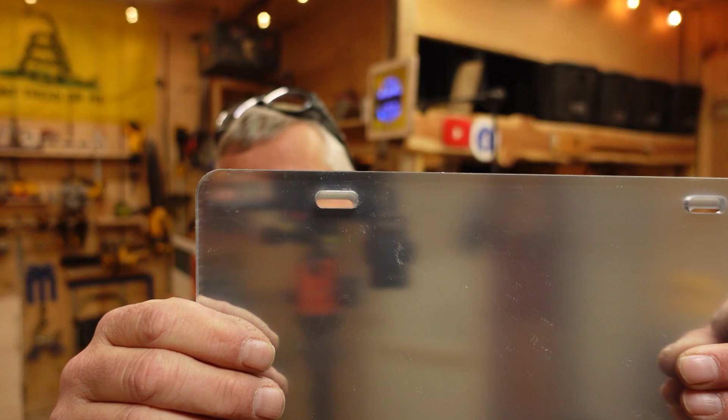This is a tag that he is using for a multi-layered project. I don't know if you can see it, but the holes on the blanks that he got, the holes ain't where they need to be. So this is the acrylic outer part that he's going to be engraving. This is basically just a metal backer that everything will be adhered to. Well, that's a problem when you can't get the screws through it.

So because Tim does have a Thunderbolt machine, he can cut the acrylic, but he couldn't cut the aluminum. So he asked me if I could do it, and guys, it was a mystery, but we're going to try. So if that's something you're into, stick around, and we're going to see if we can't cut this aluminum tonight.

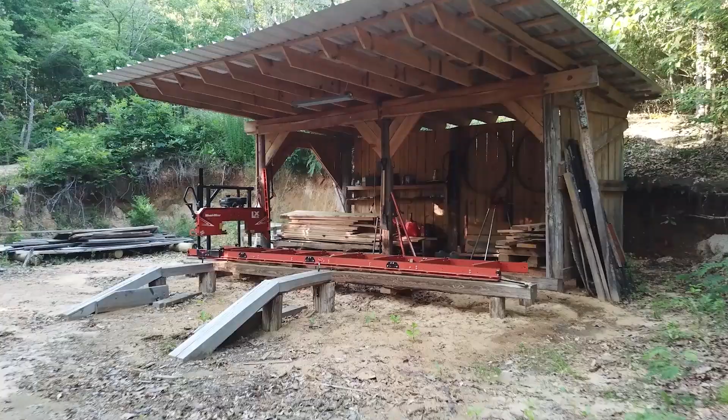All right, guys, so a lot of you are probably like, Clack, you can't cut aluminum with a laser, and you would be right, guys. But you can cut it with a CNC, or so I had been told. And when Tim asked me about the project, I don't like telling people no, but this was, guys, just for the record, this is a laser and CNC job that I'm doing tonight.

The main file, I'm gonna show you the screen capture, and kind of walk you through the process of how I went about creating the file. But I basically have created myself a template, which I may use in the future with some acrylic, that mimics the tags. I use the acrylic one that Tim needs the holes to line up with so that I know how to modify these guys.

And in the process, I made myself a jig for the CNC to allow me to insert these things into a jig and just rip them out. I've done most of them. I've got like 3 left. And I thought about it, and I was like, I bet these guys would like to see this process and kind of see how I got it set up. But so that's what we're going to do.

I'm going to walk you through the computer part of it, and then once we get through that, I'm going to take you over to CNC, show you how I got it set up, and let you watch a couple of them in action. So let's get started.

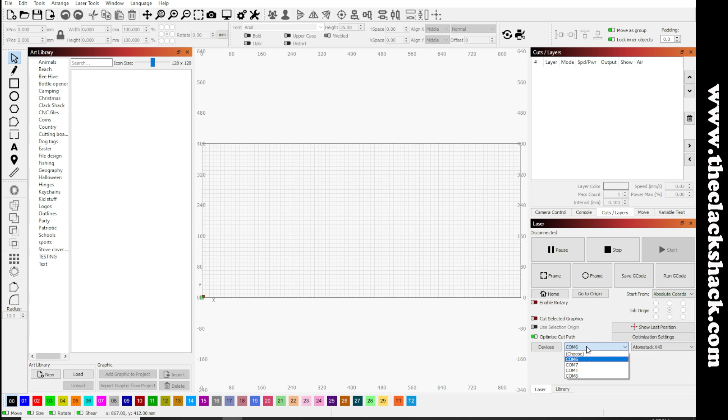All right, guys, and there's probably better ways of doing this, and I wound up kind of redoing the holes after it was all said and done. In VCarve, but this is an easy way. If you don't have VCarve to modify files, you can get really close. Now sometimes there's going to be some testing, but basically what I've did is I've used the camera to capture the shape.

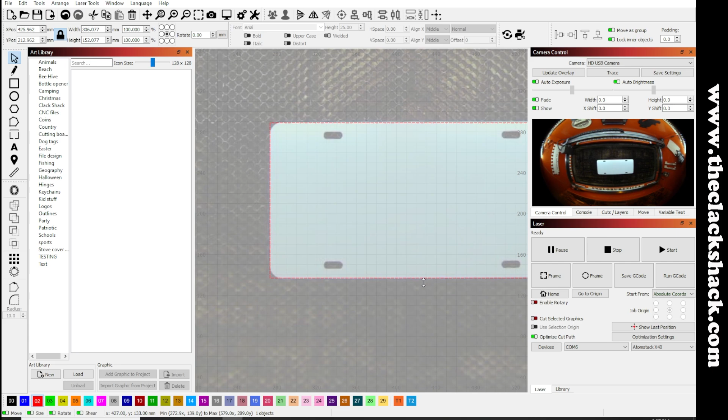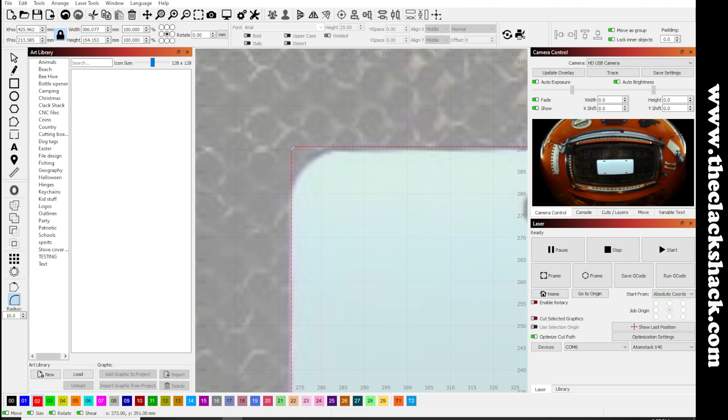I'm just drawing a box around the edge of the shape to try to mimic how big it is in LightBurn. Now, depending on your camera calibration, the thickness of the material, there's some variables that can cause some variations, but it's really handy when you're trying to design something to be able to kind of see the beginning product and what you want it to look like and just work through it from there. So we'll just kind of go through this a little bit faster here. I'm tracing everything out and just adding circles and squares and all that kind of stuff to try to create this shape.

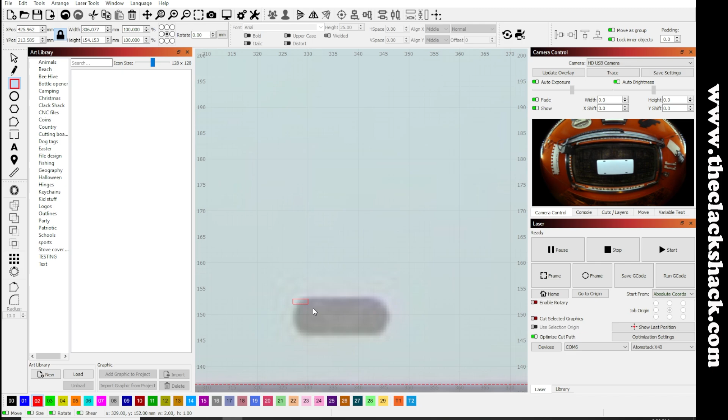I'm going to add a couple of squares, just small squares in the middle, and then a couple of circles to make that shape that's on the material. So basically I created a little box and a circle, and now I'm going to take the circle and replicate it because I know the spacing from center to center is exactly the same as that box. I'm going to set that up and make sure to get my spacing right, which should be 7 millimeters.

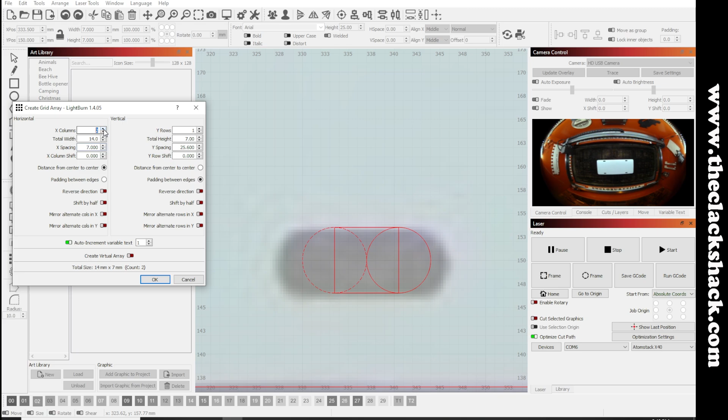Once I replicate that over, it's going to automatically line everything up for me, and that'll give me the ability to use the addition function on the booleans to make it look like that shape. Now it's going to need some resizing, but basically that just keeps me from having to go through it with the node editor trying to set that up.

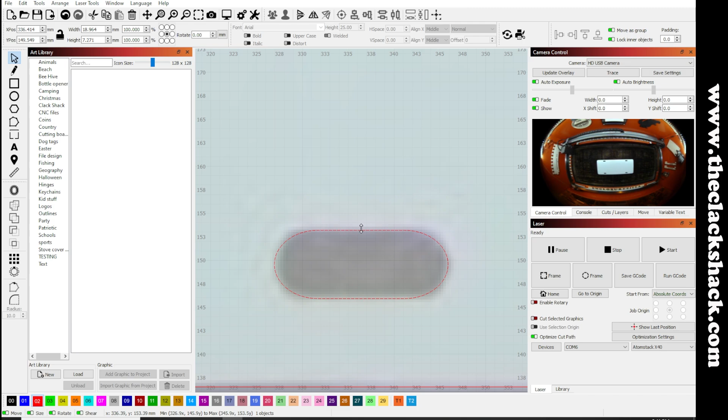Like I said, I had to make some adjustments once I got it to the CNC, but this gives me a good SVG going into VCarve to get this started. Basically all I'm going to do is create 4 of those, or 3 more, and add them everywhere there's supposed to be a hole. So once I got the outline of the tag done, I went and got myself a piece of material.

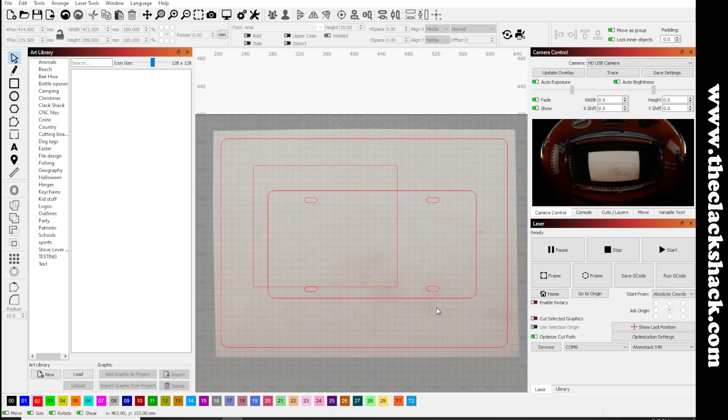What I'm doing here, guys, is I want to create a jig that I can attach to my spoil board with screws to hold this tag in place. So that's what I'm doing now, basically outfitting this thing to work as a jig once I cut it out. That will enable me to repeat the process with all these tags without having to worry about placement or whatever. I'll be using 4.5 millimeter Luan.

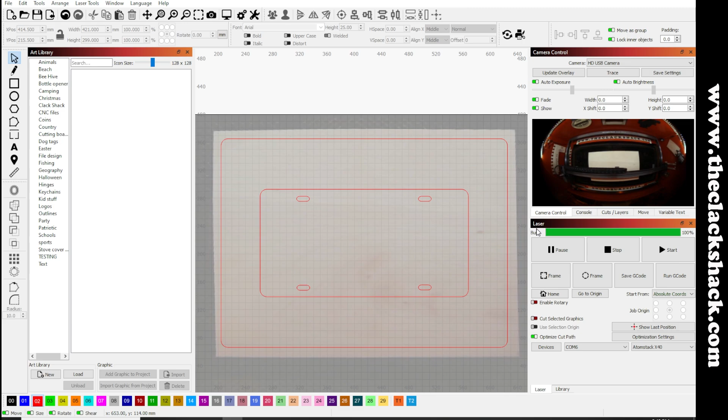All it is, the only purpose of the Luan is to hold the tag down. I'm going to try to set the speeds and stuff so maybe it won't fly off of there. So I send the job over to EnclosureZilla and get it started, and I'll let y'all see a little bit of this and fast forward.

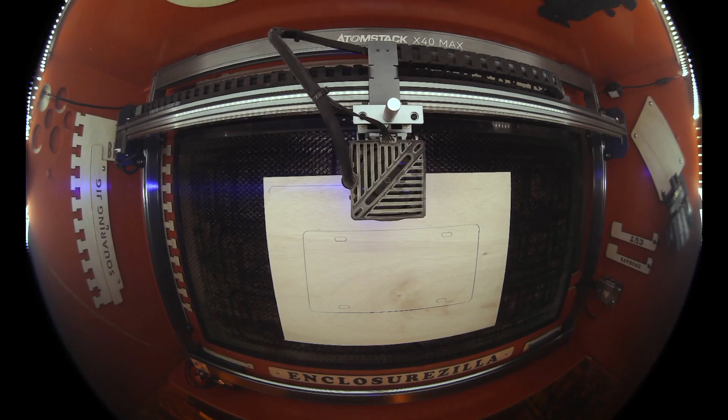All right guys, so over at Vectric, the way I'm going to do this is bring an SVG file in that I exported out of Lightburn, by creating a new file. Now on this file, and I'm having to redo this, a lot of my settings are already in here, lucky me. Even though this is a new file, the settings are already here.

So the dimensions of the tag itself are 304 by 152, and according to my cheap calipers, it's 0.65 millimeters thick. So I'm going to set it to material surface, and I want my zero to be in the bottom left corner because I plan on utilizing the little dead space where that curve is as my zero. That'll also give me a reference that'll be easy to find on my material.

I probably should have put that in the file for the laser file of the jig that I made, but I didn't think about it until it was too late. So now that I've got my work area the way I want it, and it is exactly the size of the tag...

I'm going to go over here and go File and Import Vector, because I saved it as an SVG. This is my CNC file, so I'm not going to be in that folder. I saved this as a laser file over here in my laser stuff, and we're going to be looking for the file of license plate, which is here. And there's the SVG that we exported. I'm going to bring that in.

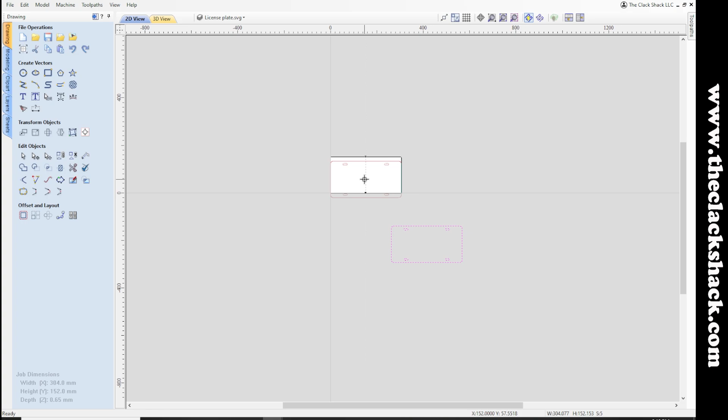I'm going to come over here, grab this guy, and drag it into the work area. And it should snap in the middle. So it did.

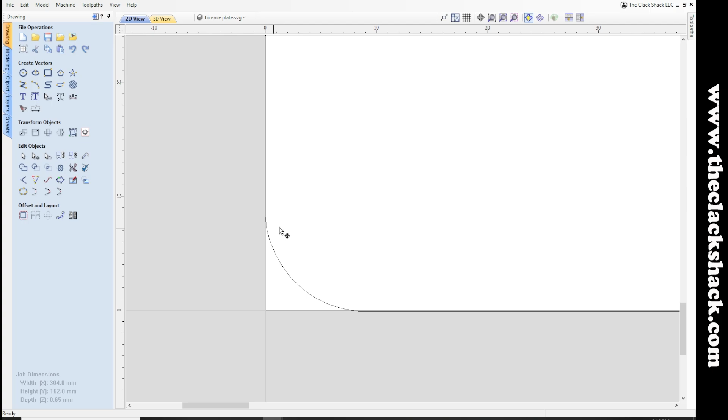Now, on my little jig, right here is where I made those lines, and where those lines intersected, that's where I set my zero at. And having this little curve here actually afforded me some flat space up above the work area to do it. Now, I did set the Z-axis on the material when I was getting ready to cut.

So that's one thing you got to be mindful of. Using this jig, you're going to have to set the Z-axis using the probe here in the working area of the material. Now, all I did, once I got it in here, guys, I did come back and do a little bit of tweaking and adjustments because it wasn't exactly perfect.

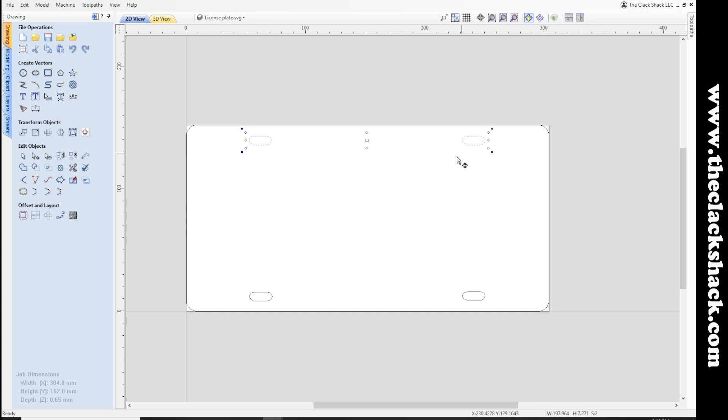But basically, you would go in here, select these 4 little holes right here, and I'm still learning this stuff, so bear with me. And then I set my depth, but even though my caliper said that the material was 0.65, I went ahead and did 0.55 because I didn't want to go into my spoil board too much. Like I said, I was afraid with that upcut bit, I might drag some wood chips up there and pull that thing loose from my jig.

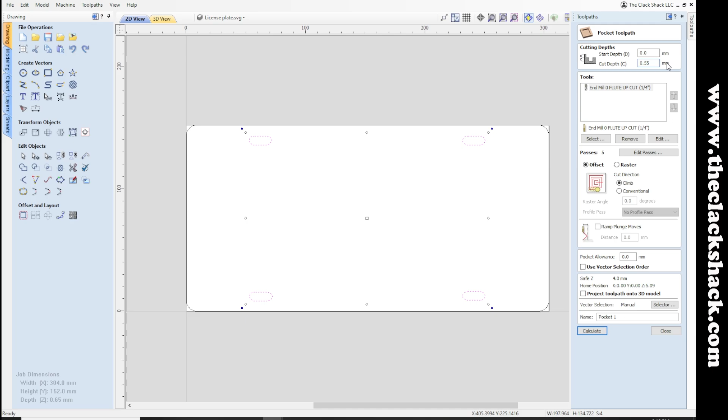And I was running the Zero Flute bit, and I've got some cheap bits made by SpeTool that you can buy on Amazon, because I don't want to tear up any expensive ones until I learn what I'm doing. So that's the bit I'm running, the Zero Flute upcut end mill, 1/4 inch. And I've got it set to where it's diving really, really small steps.

I even set the step over to 20%, to try to avoid any kind of tear out or binding or anything like that. And it seemed to do pretty good.

Now, the spindle speed, I just ran it on the second setting on my Makita. I do have a chart, but I find that number 2 on the Makita seems to work with most everything, and this was an experiment anyway. I slowed the feed rate down to 30 and the plunge rate down to 4 in order to do this job.

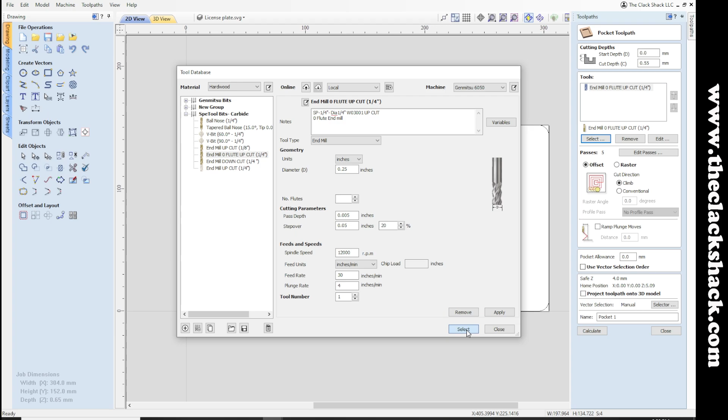And then once you put all that in there, guys, if you're used to the software, you know how it works. Go in here and calculate it. I don't know why it did 2 of them. Go in here and calculate the work area.

And I like to always, for some reason, and this is just something I really, really do like about VCarve, I like to go in here and just preview them and see where they're going to go, just to make sure nothing crazy or unexpected is happening.

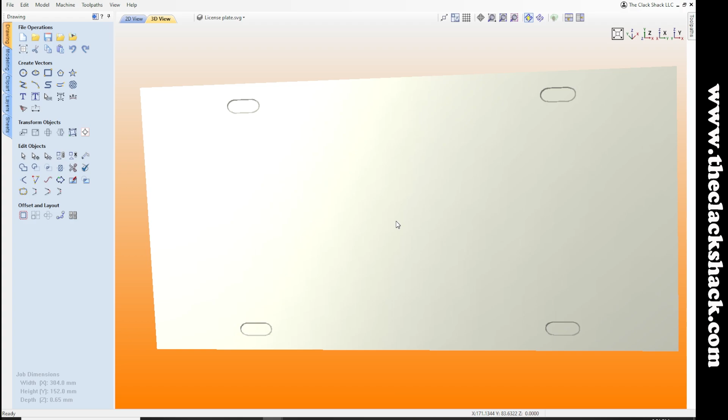And because I do have my depth of cut set different than the thickness of the material, they're not going to go all the way through. In order for me to get them to go all the way through, I would have to go in and set this back to 0.65, which is fine. I mean, it'll do it either way.

So we're going to reset that. Just let you see this. So if I set it to 0.65, it's going to show what it's going to look like. Now, of course, the tags do have rounded corners, but you get the idea.

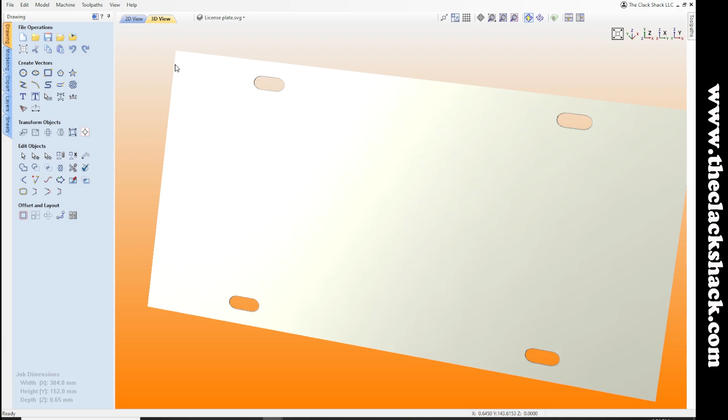And so then, if you're not familiar with the software, I'll go ahead and run you through this because I know I got folks like Klein that's trying to learn how to work VCarve. You can go over here and take a little peek and see how long it's going to take for that cut to run.

And that's one reason why, as I was cutting them, I went back and changed the depth of cut. It's because it was taking a little longer and it was actually going into the spoil board a little more than I wanted to. So I went back and changed the thickness, and it only made it take like 2 minutes once I changed the thickness.

You can preview that to get an idea of what the time is going to be, and then all you've got to do is hit save the toolpath. The way I've got mine set up, I have a shared drive over on the machine that runs the CNC, and I send my designs over there and execute them with Candle software that came with the Genmitsu.

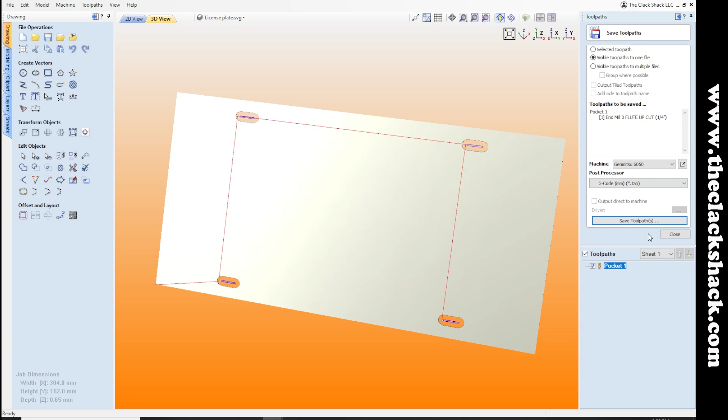And then the next part, guys, is the actual cutting. So let's go see some sparks fly. Or maybe not - maybe there won't be sparks flying. All right guys, so this is where the cutting is going to take place.

All right, this is my SainSmart, the new 6050 I just recently got. I've been playing with it. I'd been wanting to try some aluminum, so I went out and bought some aluminum blocks. When Tim asked me if I could do this job, I'd already been studying the process, so I thought, why not? Now, these things are really thin - not like we're machining anything significant. They're literally like half a millimeter thick, so I felt like it'd be a job we could do, and I've done all of them except for these two.

I showed you the process of how I set everything up in LightBurn, moved it over to VCarve, but once we got to the physical machine, there was a process I had to do, because of how I built the file for the tag, for two different reasons. I made the file with rounded edges so I could set my zero to be the corner of the square here.

I'll try to get you a better video of this as we go forward. But I've created this cutout, and that's how I made the other little wooden tag. This cutout lets me place these in here really snug so they can't go anywhere. My only fear was that it would snatch them out, because I'm using a zero-flute upcut bit, but I'm only going 5 thousandths at a time for the passes, just to be sure I don't hang the bit up and cause it to snatch the material, since it's lightly held in here by the fit inside this little jig I made with the laser.

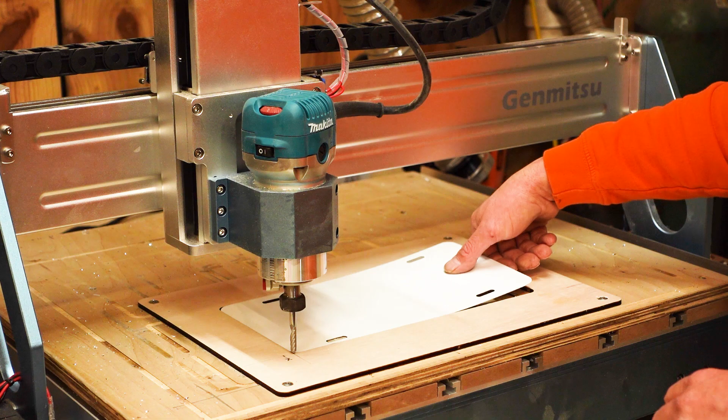All right, so the way I've got my jig here, this tag literally has to be pressed into this jig to hold. I made it very tight on purpose, and because the material is so thin, I'm actually kind of marking the spoil board - going a couple thousandths past the bottom of the material, but not bad.

For what I had to do here, because of how I designed it in VCarve, the material is exactly the same size as the tag. I did that so my zero would be right here in the corner where these two straight lines come out. I probably could have done it in the laser, and if I'd thought about it, I would have - it would have been much easier to extend this line and make myself a crosshair there. But I didn't, so I did it with a pencil and my trusty ruler, and made myself a zero-zero on this panel I've inserted as a jig. That way I know where I need to zero in order for my operation to run the way I want through the G-code.

Once I got that locked in there and made sure it's good and level - my relay is out, I've got another one coming tomorrow, so I'm still having to manually turn my router on - but I'm going to turn this on, guys, and move over to Candle and send the file.

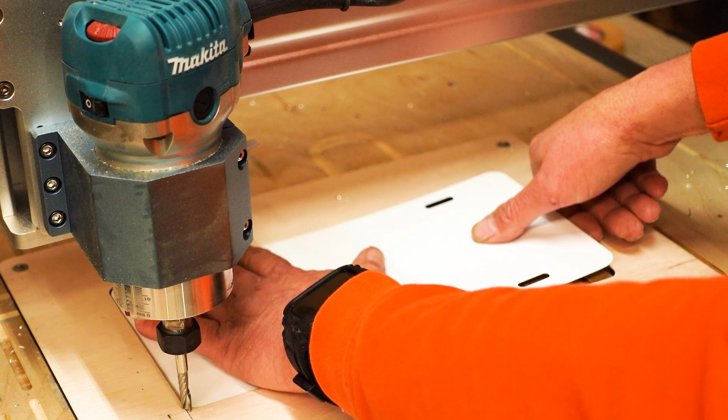Then I drop another one in. I probably could actually sandwich two or three of these together and do them, but I'm being careful, guys. I don't know how many Tim has of these things left, and I do not want to be responsible for tearing up all this stock. He did donate one to the cause if I had to figure out my settings, but I went really slow and worked my way up to get it the way I wanted it.

So let me reach across you here. I'm gonna hit OK because that job has completed. Turn the spindle back on. And I'm gonna send it again.

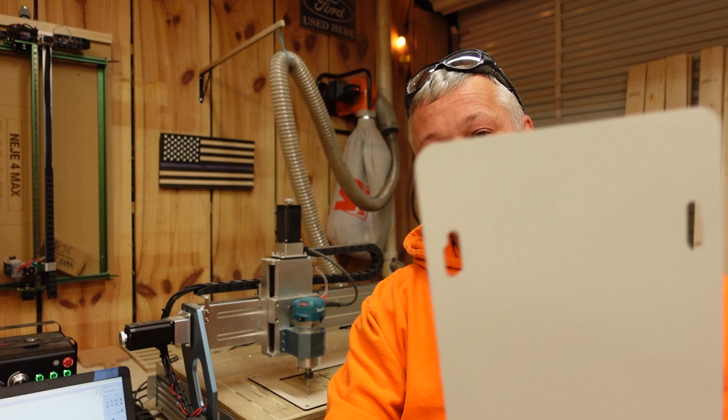All right guys, so that worked out. I got all of them done now and managed to save all of his inventory, no problems. And like I said, hot off the presses, I have moved the holes over.

The holes in these were a different shape than the one in the acrylic tag as well. I'm not sure if he got these from the same vendor or what, but it's pretty awesome that I was able to help him out with this and get these things straightened out the way they needed to be.

I'm not real sure that any of these tags are symmetrical. When I was measuring them and trying to lay everything out, there were some variations on both the metal tags as far as the hole spacing, as well as the acrylic. But it seems that at least on the test piece he gave me to design the file, I've got these holes where they need to be. So I'm just hoping this works out.

But at least now I have settings for really thin aluminum for the Genmitsu 6050. All right guys, so I'm gonna call that a success.

I'm gonna try to line these up in my hand best I can. The holes are a little oblong now as far as the added hole I put in there, but I can't fill those holes in. I did enable Mr. Tim to be able to take his acrylic tags that he has and utilize these guys. So that was the big thing, he didn't want to waste the materials.

And you can see there, guys, I can see you through the hole, and that is the way it's supposed to look. You can see here how far off the holes were, and it was really hindering Tim from putting the tags together.